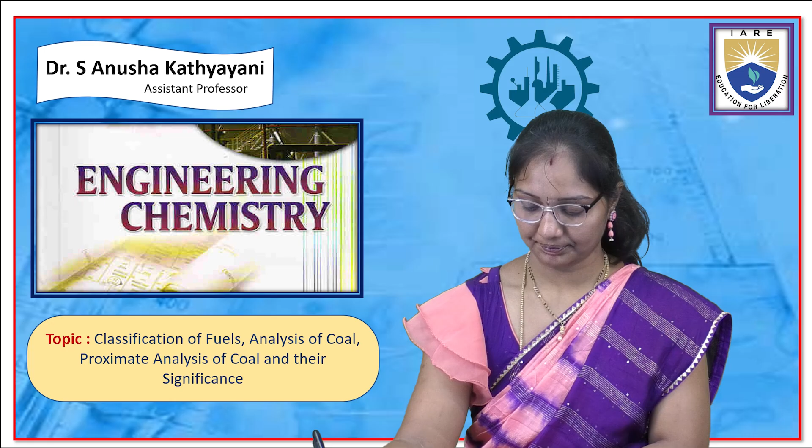So the fuel is a chemical substance which on combustion produces a large amount of heat and energy. The produced heat is used for both domestic and industrial purposes. The fuels generally contain hydrocarbons. Hydrocarbons are a combination of hydrogen, carbon and oxygen as main constituents, and sulfur and nitrogen are present in very trace amounts as contaminants. The constitution of these fuels is carbon, hydrogen and oxygen as main constituents.

So what is combustion? Combustion is a process where any substance burns completely in the presence of oxygen. That process is called combustion. On combustion of any substance, a large amount of heat will be released. So any substance burnt in the presence of oxygen, this process is called combustion.

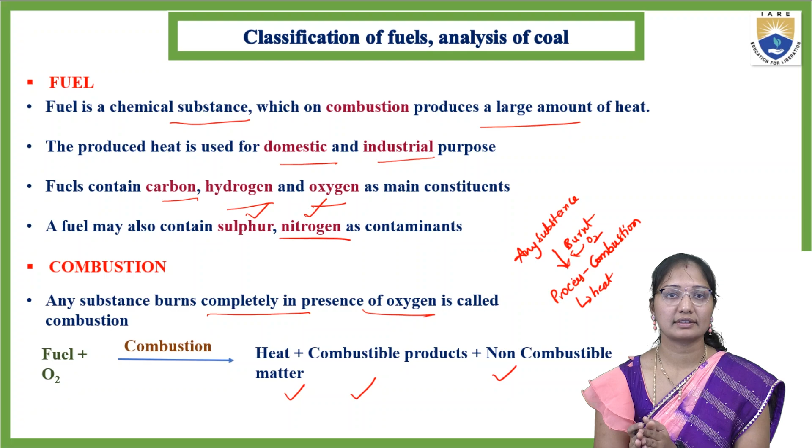So by the burning of any substance, it releases heat, plus combustible products and non-combustible products. So the process of combustion in the presence of oxygen results in heat and combustible and non-combustible products or matters.

So the classification of fuels. Generally, fuels are divided based on their occurrence and the state of aggregation. Based on occurrence or preparation, on the left hand side, there are two types: natural or primary fuels, and artificial or secondary fuels. Under natural or primary fuels, we can see coal, which is formed naturally due to heat and pressure in the earth. Plant materials or animal debris undergo heat and pressure in a continuous closed environment and are converted into fuels.

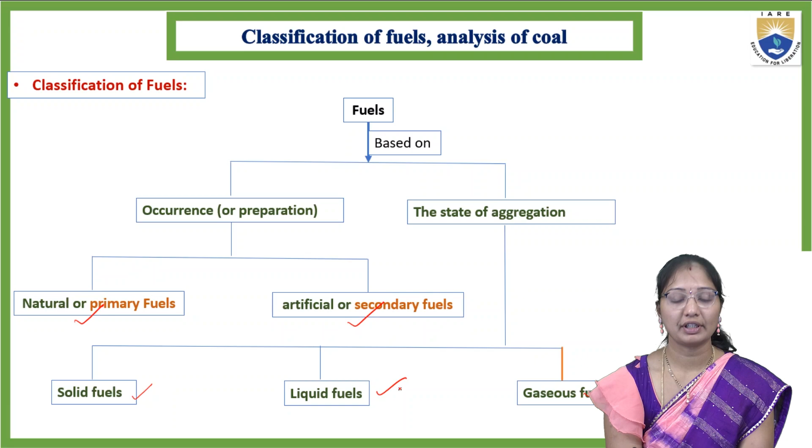Coming to the state of aggregation, on the right hand side, there are three types: solid fuels, liquid fuels and gaseous fuels. So the first category is based on occurrence and the second on the state of aggregation, based on the physical property. Whether it is in solid, liquid or gaseous form, these fuels are divided into three types: solid, liquid and gaseous fuels.

So what are natural or primary fuels? These are found in nature, such as wood, peat, coal, petroleum and natural gas. And artificial or secondary fuels are prepared artificially from the primary fuels, which are of natural origin. Examples: charcoal, coke, kerosene, diesel, petrol, coal gas, oil gas, producer gas and blast furnace gas.

So in secondary fuels, the starting product is the primary or natural fuel. This is like a crude material; it undergoes the extraction process, further processing of the crude extracts, and then it is refined. So the kerosene, petrol and diesel we use are all formed from natural or primary fuels. It acts as a source to get these secondary or artificial fuels.

So the next types of fuels. In natural or primary fuels in solid form: wood, peat, lignite, dung, bituminous coal and anthracite coal. These types of coal we are going to see in detail in the next slides. Again, natural and secondary fuels are each divided into three types, solid, liquid and gaseous, based on their physical property.

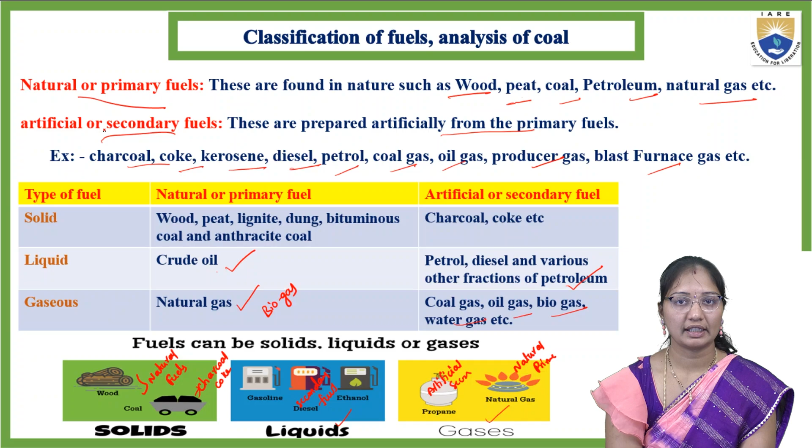So now we know what fuels are. So what are the characteristics of good fuels? It should have a high calorific value. Calorific value means the burning capacity of the substance should be high. And moderate ignition temperature: when we are going to start the burning process, it should catch easily and ignite easily. So it should have a moderate ignition temperature.

Then the low moisture content. If the substance has more water, it will take a lot of time to ignite. So to avoid wasting time and fuel, we need a low moisture content fuel. We have to select it in such a way that it is moisture free.

And low non-combustible matter. As we know, when a substance undergoes the combustion process, it is heat plus combustible material and non-combustible material. Once heated, this process is called combustion. In this process, non-combustible material should be low, with moderate velocity of combustion; the heating process should be moderate. The velocity of the reaction should be moderate, not too low, not too high. If the velocity is moderate, it gives high combustion value and high heating temperature.

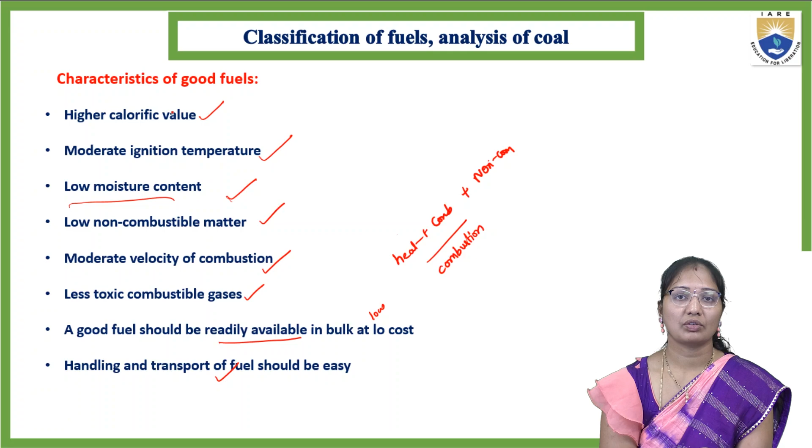Handling and transport of fuel should be easy. To transport from one place to another, the handling and transport of the fuel should be easy and low cost, with high calorific value, moderate ignition temperature and moderate reaction velocity, followed by low moisture content, no toxic gas release, and low non-combustible product yield. So these are all the characteristics of a good fuel.

These are the characteristic properties of solid, liquid and gaseous fuels. Coming to the solid fuels, coal. Coal is cheap as it is available easily, easy to store, and its hazard risk is comparatively less. The combustion rate is a slow process, and combustion cannot be controlled by us. So first we will see the solid, liquid and gaseous fuels here, then we will move on to another slide.

The example of liquid fuels is crude oil. This is a natural or primary fuel. Compared to coal solid fuel, it is a bit costlier, and closed containers should be used for storing because it is a liquid. The combustion rate is fast compared to coal and cannot be controlled or stopped when necessary. So it is not in our hands; the rate of these reactions cannot be controlled.

Coming to the gaseous fuel, coal gas, it is costly compared to both solid and liquid fuels. The storage space required is huge and it should be leak proof.

Being a gas, it should be leak proof and we need huge storage space. The risk is very high because these gases are highly inflammable; it catches fire easily. Very rapid and efficient combustion rate, controlled by regulating the supply of air. So by the supply of air, we can control the combustion rate of this coal gas or natural gaseous fuels.

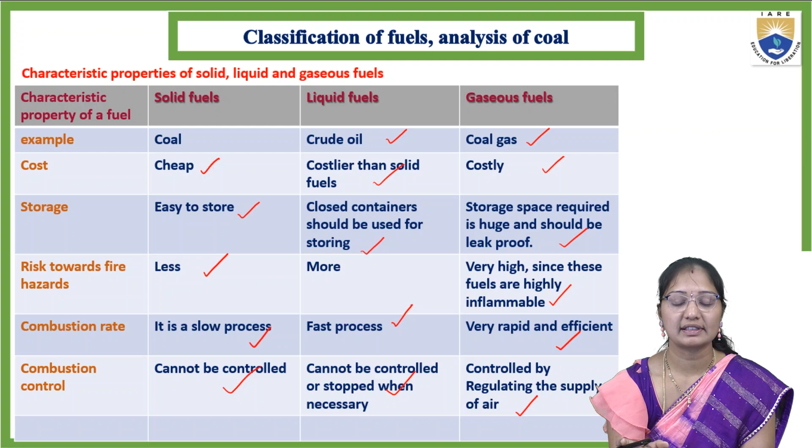Coming to the handling: for solid fuels, liquid fuels and gaseous fuels, we will compare handling, ash, smoke, calorific value, combustion rate and heat efficiency. Here handling is high since labor is required in storage and transport. Being a solid, it requires more labor, both to transport and for storage.

For liquid fuels, it is low since the fuel can be transported through pipes. And for gaseous fuels this is also low, because gas can be transported through pipelines and attached to transport vehicles. So compared to solids, liquid and gaseous transport is easier.

Ash is produced and its disposal also causes problems. In solid fuels, combustion results in more ash, and the disposal of this ash causes a problem. In liquid fuels there is no problem of ash, and the same for gaseous fuels.

Smoke: solids produce smoke invariably. The combustion of solids like coal gives an enormous amount of smoke, causing environmental pollution. Liquid fuels are clean, but liquids associated with high carbon and aromatic fuels produce smoke, very less compared to solids. Gaseous fuels produce no smoke.

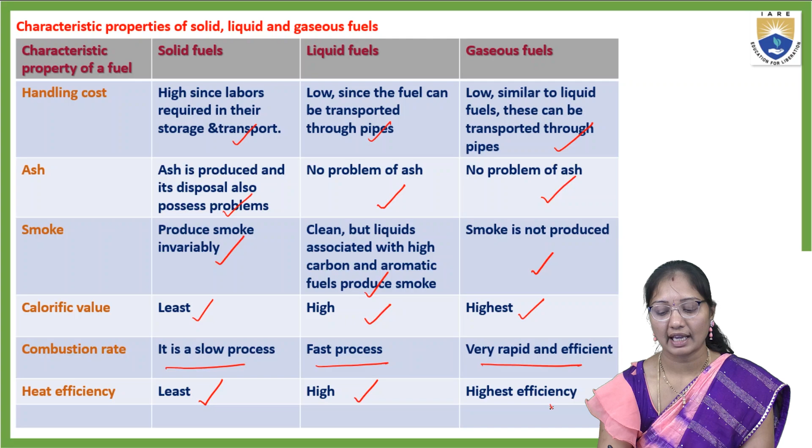The combustion rate should be moderate. In solids it is a slow process, in liquid fuels it is fast, and in gaseous fuels it is very rapid and efficient. Heat efficiency is least in solids, high in liquid fuels, and highest in gaseous fuels.

We are going to discuss more about solid fuel, one abundant source, which is coal. We will see how coal is formed: a process of conversion of peat to coal, from peat to lignite, then bituminous coal, semi-bituminous coal, and finally anthracite coal. The main solid fuels are wood, peat, lignite, coal, and charcoal. We will look at coal in detail.

Coal is a rock that can be burnt, and an energy source. It is a sedimentary rock and energy mineral; legally a mineral, but scientifically a rock. Coal is a fossil fuel derived from fossil plants, formed from the debris of animal and plant materials under high temperature and pressure in the earth's crust. It is mainly carbon, hydrogen and oxygen with trace amounts of sulfates and nitrates.

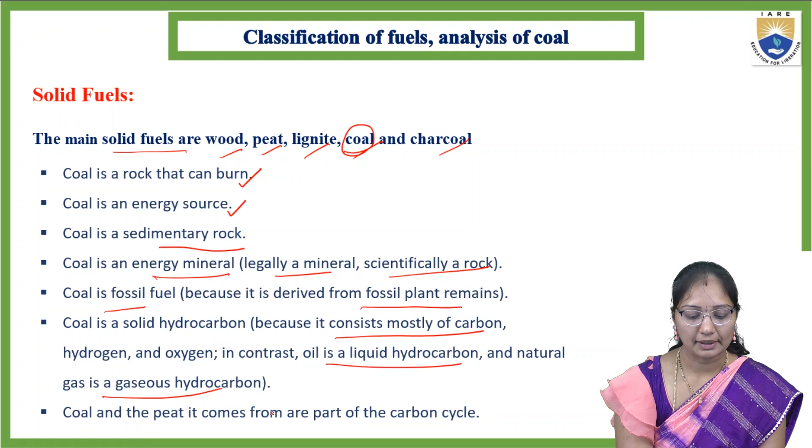In contrast, oil is a liquid hydrocarbon and natural gas is a gaseous hydrocarbon. Whether solid like coal, peat or wood, liquid like crude oil, or gaseous like natural gas or coal gas, hydrocarbon is the constituent of all these fuels. Coal and peat come from part of the carbon cycle.

Coal is a fossil fuel occurring in layers of the earth's crust. It formed by the decay of plant materials accumulated millions of years ago, further altered by heat and pressure inside the earth. Coal is formed from physical and chemical reactions of peat. What is peat? Peat is plant material accumulated in wetlands which breaks down through the process of peatification.

That process is called peatification. If peats are buried, then the peats are altered into different ranks of coal. So there are different ranks in the coal category based on the content of carbon in their structure. They are ranks in the coals. So that process is called coalification.

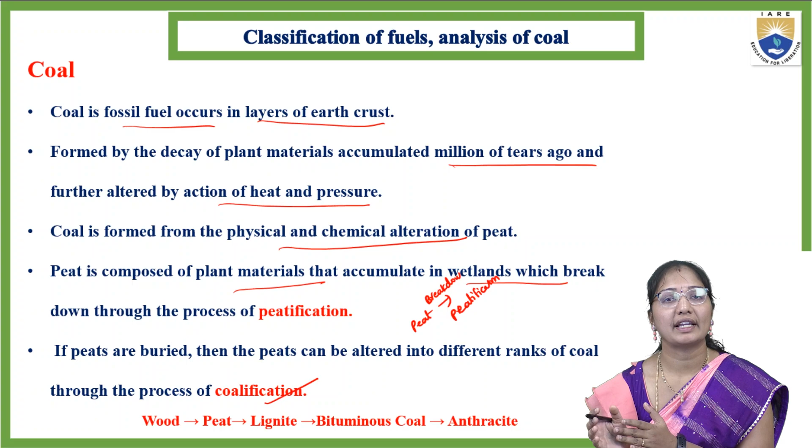So first, the process of conversion of wood to coal is this. Wood will be converted into peat, peat again into lignite, then bituminous coal, then the final is the anthracite coal. So this is the peat. What is peat? It is a brown, fibrous, jelly-like mass. So this is nothing but the plant material in wetlands of the earth crust.

So lignite. They are converted into lignites after a long period, like millions of years. These peats in the earth crust are converted into lignites. What are lignites? They are soft, brown colored and lowest rank coals. So the carbon content in the lignite will be less. Compared to the lignite, the peat will have very less carbon content.

So on increasing from peat to anthracite, the carbon content gets concentrated, and more carbon content will be there in the anthracite coals. So what are bituminous coals? These are pitch black to grey coals. Then anthracite. It is the highest rank coal. Around 60 to 70% of carbon will be present in this anthracite.

So the more carbon content, the more calorific value. The more calorific value is a good characteristic; it burns easily and the reaction will be high. The speed of reaction will be high, and more carbon content means more combustion, high calorific value. So from peat to here, the calorific value increases.

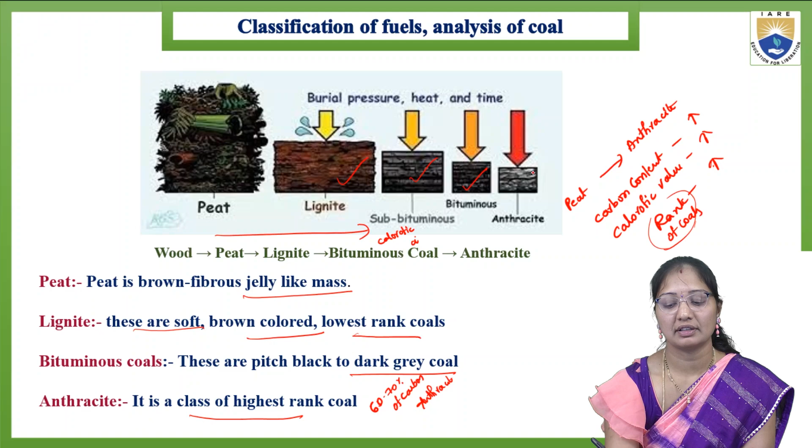Burial pressure, heat and time play a crucial role in the conversion of peat to anthracite. This is brown lignite, subbituminous and bituminous. The final one is anthracite coal. So fuel, and this is the percentage of carbon. Wood is having only 50% of carbon, and the calorific value is 4000 to 4500, and it is used as a domestic fuel. Whereas the wood is converted into peat.

Peat is having 50 to 60 percent of carbon. So in 100%, the main constituent is 50 to 60% of carbon, and the calorific value is 4125 to 5400 kilocalorie per kg. So the use of high rank coal is prevailing. So the lack of these coals makes the use of this peat in the industries.

Coming to the next category, lignite. This is a brown colored mass having 60 to 70% of carbon content. It gives a calorific value of 6500 to 7100. It is used in thermal power plants for steam generation. This lignite is used specifically in thermal power plants.

Whereas the bituminous or sub-bituminous coals contain 80 to 90% of carbon, meaning 80 to 90% of carbon is present in 100% of coal. So only about 10% of contaminants, gases or minerals will be present. So the calorific value will be high, around 8000 to 8500. This bituminous coal is used in the manufacturing process of coal gas and metallurgical coke.

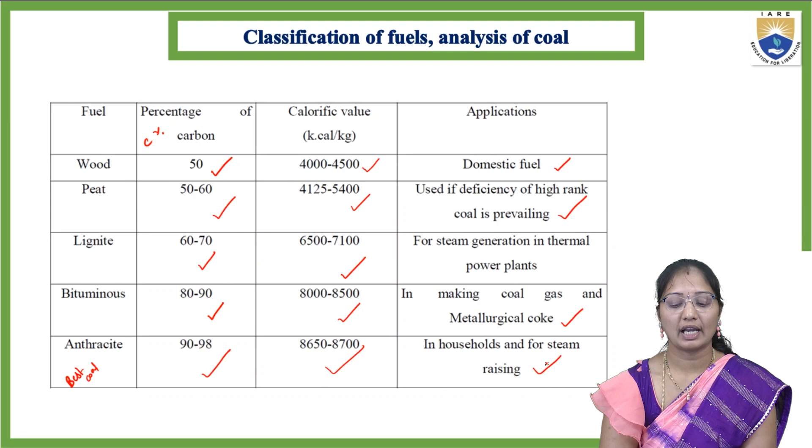Coming to the last category and the best coal, anthracite. This is having 90 to 98% of carbon. The calorific value is 8650 to 8700 kilocalorie per kg. It is used in households and also for steam generation or steam raising in industries.

So the analysis of coals. We know the brief outline of the coals. So the coals are hydrocarbon compounds. The ranking of the coals depends upon the percentage of carbon present in the coals, and the calorific value also depends upon the percentage of carbon present in those coals.

So how can we know the percentage of carbon in these coals? For this, the analysis is the main important thing. So the coals are tested prior to being used. Before using, these coals are analyzed and tested.

Some markets generally require some quality characteristics before use in the industry or in thermal power plants. Environmental regulation also requires knowledge of the coal's quality. Some products also require analysis of physical characteristics of coals in handling and processing treatments.

So there are some standard tests which were developed by the American Society for Testing and Materials. They set standardized procedures for analysis of these coals. They have a protocol for handling and sample preparation as well as the analysis of these coals. So they will give the ranking based on their analysis results.

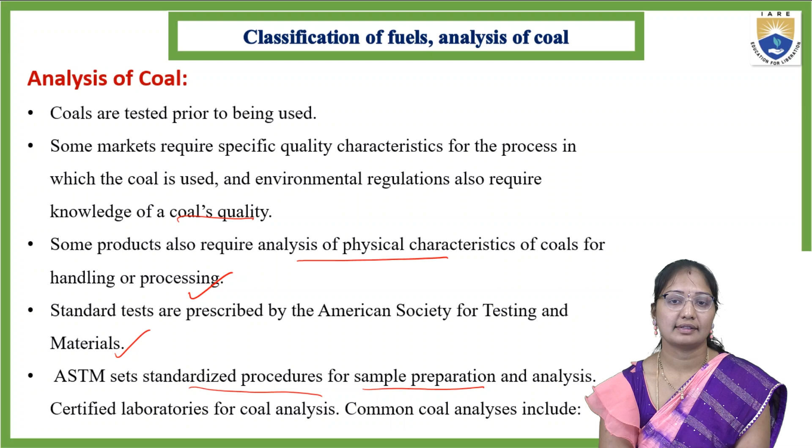So why should the analysis of the coal be there? Because it helps in its ranking. It helps in classification and the quality of the coal, and elemental analysis, and based on the results we can use it in the industries. For this industrial application, this analysis has to be done.

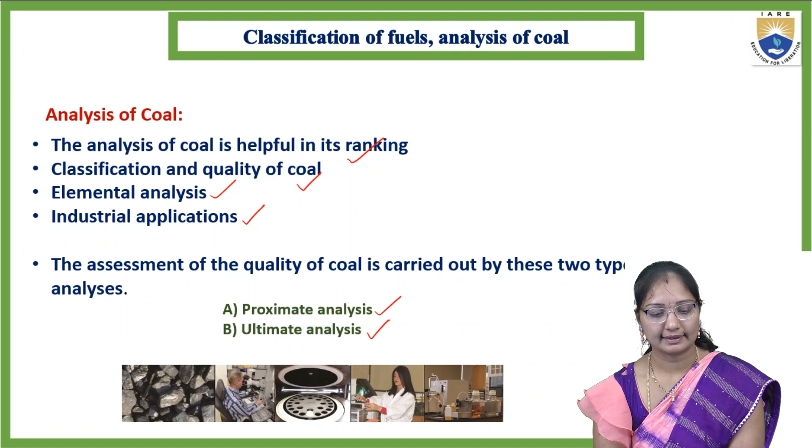The assessment of the quality of coal is carried out by two types of analysis: one is proximate and another is ultimate analysis. In proximate analysis, we indirectly determine the carbon content in the coals. It is a quantitative analysis of the following parameters: moisture content, volatile matter, ash content and fixed carbon present in the coal.

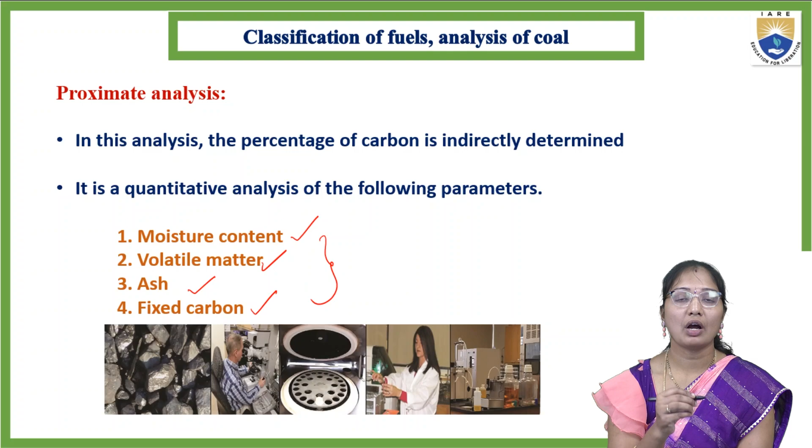So first, 1 gram of finely powdered and air-dried coal sample has to be taken inside this crucible. The crucible is placed inside the hot air oven and the temperature is maintained around 105 to 110 degrees centigrade for 1 hour. Then it is taken out and cooled in the desiccator.

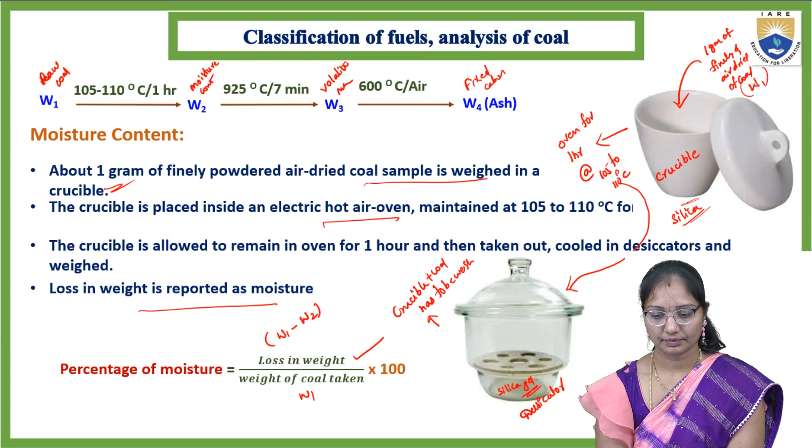Next in proximate analysis is volatile matter. Here, the dried sample is taken in a crucible, covered with a lid and placed in an electric furnace. Generally, these furnaces are used beyond 600, for maintaining 400, 600 and 900 degrees centigrade. They have a layer of glass wool. At the back some heating mantle will be there. It maintains high temperature and is insulated fully with the glass wool.

So this is maintained at 925 plus or minus 20 degrees centigrade, around 950 degrees centigrade. The volatile matter we are going to find out. The crucible is taken out of the oven after 7 minutes of heating. So we have to heat it for 7 minutes at 950 degrees centigrade. The volatile matter, which is volatile in nature, gets evaporated.

This is a dried coal sample we are taking here. Then it is maintained at 950 degrees centigrade for 7 minutes in the electric furnace. Then the resultant is volatile matter free coal. Then the crucible is cooled first in air, then inside the desiccator, and weighed again. So the loss in weight is reported as volatile matter on percentage basis. Same thing, loss in weight, then weight of coal.

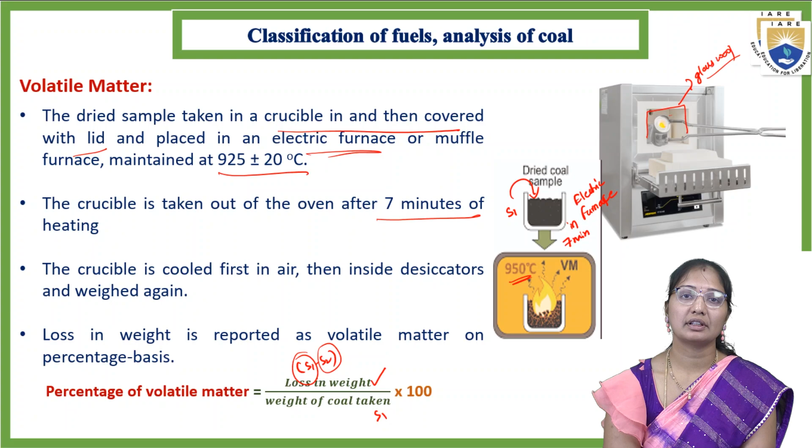Next is ash. The residual coal sample is then taken in a crucible and heated without lid in a muffle furnace. For volatile matter and moisture content, we have to close the sample with the lid, whereas here we need not close the lid. We heat it without a lid in a muffle furnace at 700 plus or minus 50, so around 700 degrees centigrade, for half an hour. So for 30 minutes we have to heat the coal sample.

Once the half an hour is completed, the crucible is taken out, cooled first in air, then in the desiccator and weighed. Heating, cooling and weighing are repeated till a constant weight is obtained. The residue is reported as ash on percentage basis. So the weight of ash left in the crucible divided by... so we have to repeat the procedure: heating of the sample at 750 or 700 degrees centigrade for 30 minutes, cooling, then weighing.

Again heating the sample for 30 minutes, cooling, weighing. And again the same. The repetition of this process has to be done until there is no reduction in weight of the sample. That means the whole coal sample is converted into ash, so there is no further ash formation in that sample. That gives the final weight of the ash.

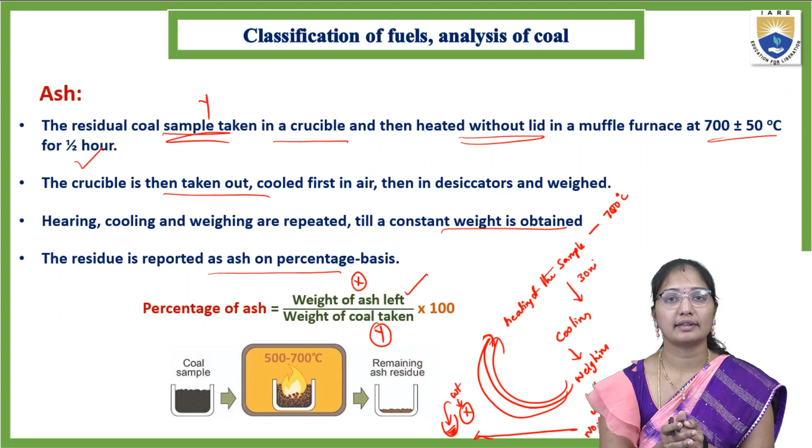Next, the fixed carbon. The percentage of fixed carbon is equal to 100 minus the percentage of all the three analyses which we did earlier, which is moisture, volatile and ash. Suppose this is A, B and C. So subtracting the moisture, volatile and ash content gives the percentage of fixed carbon present in the coal sample.

So what is the significance of proximate analysis? Why are we doing this analysis? It provides valuable information in assessing the quality and ranking of the coal. Based on the quality and ranking, we can use it accordingly in industries and thermal power plants. So the application varies based on the quality of the coal.

Moisture in coal evaporates during the burning of coal and takes some of the liberated heat in the form of latent heat of evaporation. So without analysis, if we use the coal directly, the moisture absorbed by the coal takes a lot of heat. Therefore, the moisture lowers the effective calorific value. Because of the water present in the coal, it reduces the calorific value of the coal.

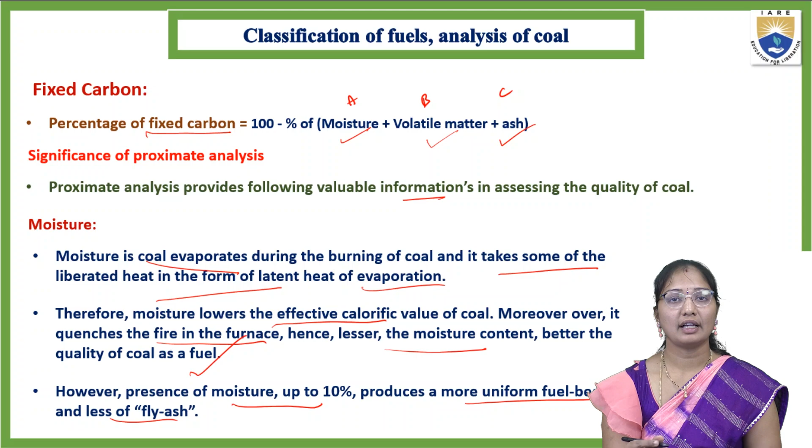Moreover, it quenches the fire in the furnace. Hence, the lesser the moisture content, the better the coal performance as a fuel. However, the presence of moisture up to 10% produces a more uniform fuel bed and less fly ash.

Volatile matter. What is the role of volatile matter? A high volatile matter content means a high proportion of fuel will distill over as gas or vapor. Generally volatile means converting easily into gaseous form. When coal is heated, the volatile matter completely converts into gaseous form and evaporates easily, a large proportion of which escapes unburnt.

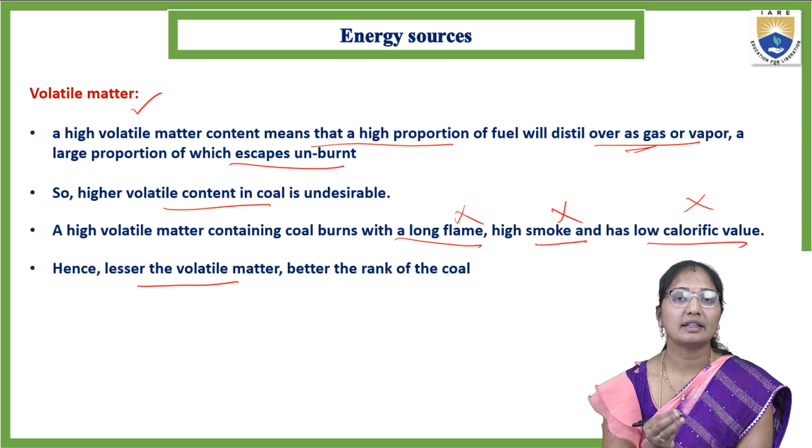So high volatile content is an undesirable characteristic of coal, as high volatile coal burns with a long flame, high smoke emission and low calorific value. The calorific value should be high, the velocity of the reaction and the flame should be moderate, and it should produce less or no smoke. Hence, the lesser the volatile matter, the better the performance, quality and rank of the coal.

Ash. Ash is a useless, non-combustible material which reduces the calorific value of the coal. Moreover, ash hinders the flow of heat and air, thereby lowering the temperature of the reaction in the furnace or in industries. In turn it obstructs the air supply, so burning of the coal becomes irregular. The lower the ash content, the better the quality and ranking of the coal.

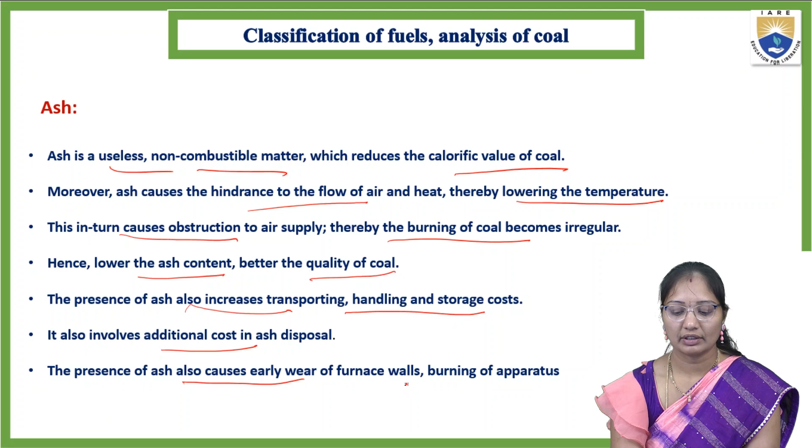The presence of ash also increases transporting, handling and storage cost. It also involves additional cost in ash disposal. Once the coal is burnt, the ash formed causes a big headache, because where do we dispose of it? The presence of ash also causes early wear and damage of furnace walls and burning apparatus.

Then the next thing is fixed carbon. What is fixed carbon? 100 minus the percentage of moisture content, volatile matter, plus ash gives the fixed carbon. The higher the percentage of fixed carbon, the greater its calorific value. It depends indirectly on all these three. If they constitute 20%, 100 minus 20 is 80. If they constitute 50%, 100 minus 50 is 50. So fixed carbon depends on the moisture, volatile and ash content of the coal.

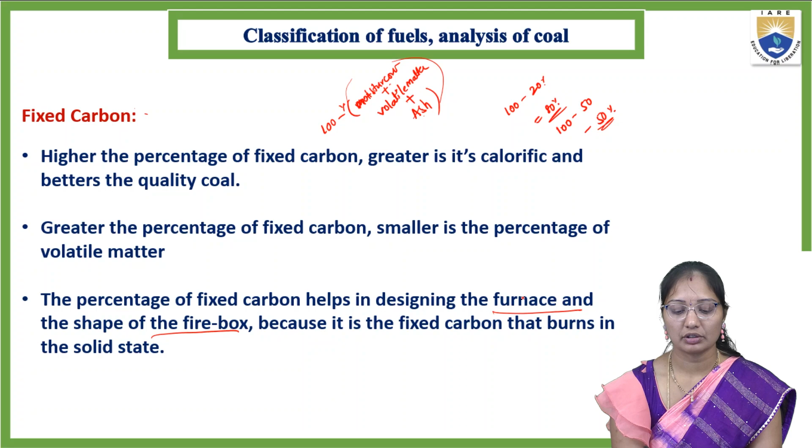The greater the percentage of fixed carbon, the smaller the percentage of volatile matter, so it's inversely proportional. The percentage of fixed carbon helps in designing the furnace and the shape of the firebox, because it is the fixed carbon that burns in a solid state. This is all about the proximate analysis of coal and the good characteristics of coal for use in industries and thermal power plants.